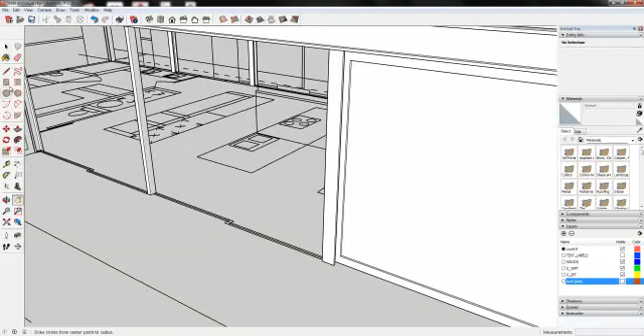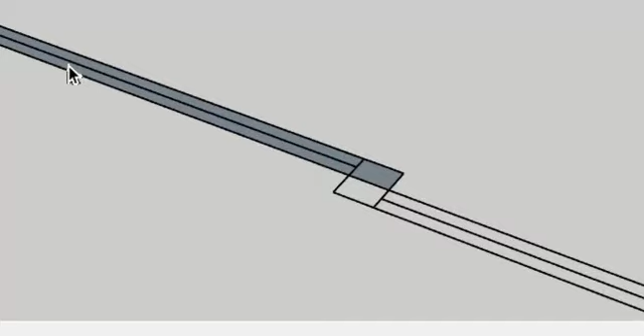I'm going to create a rectangle, zoom in a little bit, and create the bottom portion of one of my doors. From there, I will turn that into a component, and I'm going to call it glass door 1. Make sure it says replace with selection and click create.

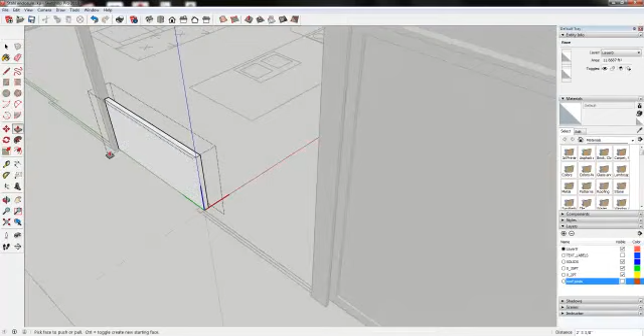Now I'm going to follow the same procedure that I did with the walls. I'm going to double click on that component, and we're going to raise that door all the way up to the underside of the beam. Now keep in mind that even though we're trying to reference construction techniques and how the building is put together, we're not necessarily modeling every single piece of the building. We're really just trying to create a reference to what we think it looks like.

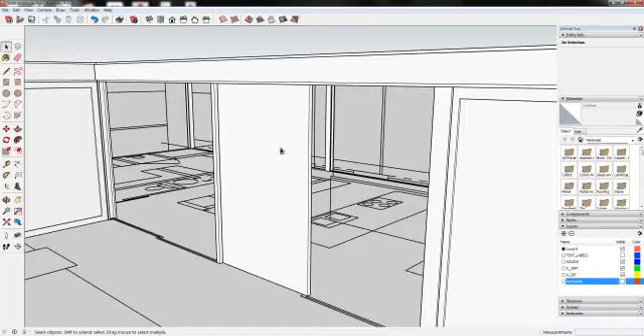So now that I've got that single door panel, let's do this just for fun. Let's make a copy of that panel, and you can see how the component feature works. I'm going to copy it into the other places where I believe those double doors exist, at least on the front side of the building. And again, that's just using the move command and holding down the control key.

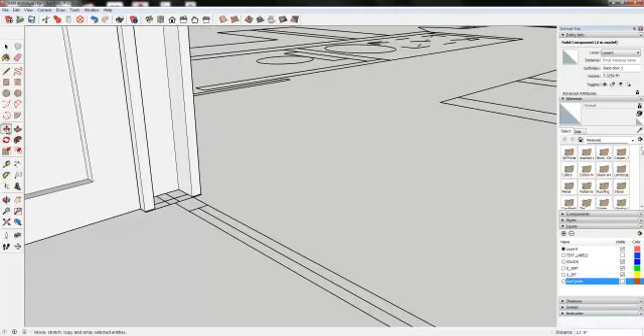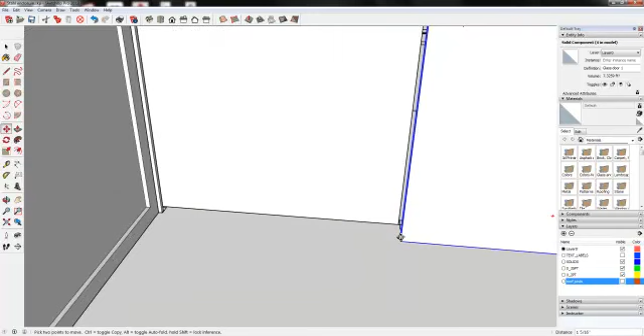Again, don't be afraid to use the endpoints as a reference. And let's copy that over to this side as well. So it's kind of an interesting intersection in that back corner. I'm going to cheat just a little bit, and we're going to move this one over to the outside frame like it would be on the other side, and hit zoom extents.

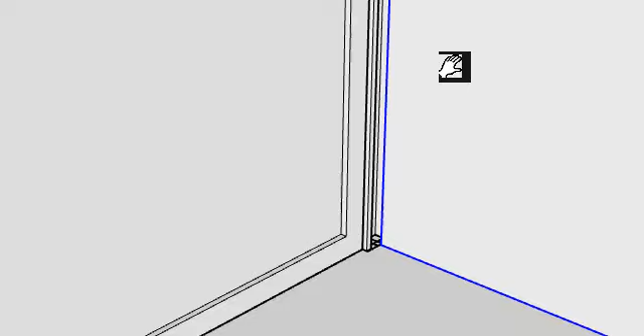Again, without construction documents, we're not exactly sure how that piece intersects at the column, but it appears like at that point it doesn't go through the flange.

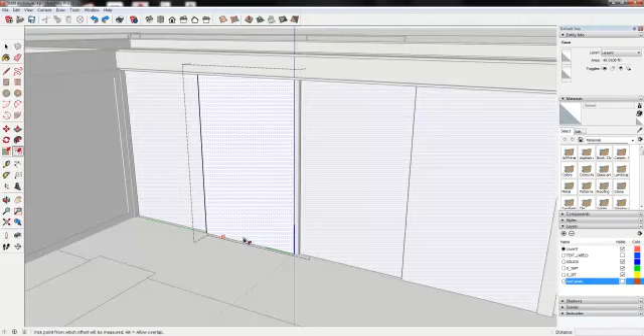So now we can select one of our doors, and we're going to add the glass panel, and we're going to make it match the existing frame system. I'm going to double click on one of those components, offset, and grab one edge of the panel and offset 4 inches. I clicked too quickly, so I'm going to grab it again and slide that in and type in 4 inches. Now you can see all 4 of the doors are showing that frame system.

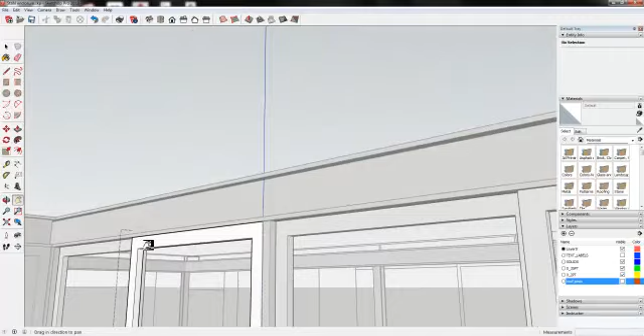And I can push that piece out till it vanishes. And then we'll go in. We're going to add materials later. I know some of you guys are anxious to get into it, but we will add the materials for the glass later. Right now, I just want to add the pane in that creates the glass.

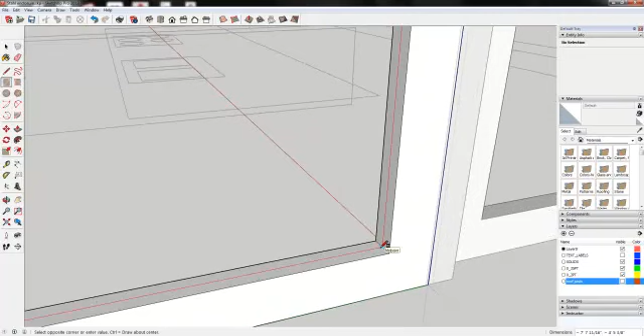So I'm going to select a rectangle, and I'm going to draw it from the center of one section of the frame and slide down and add it to the other section. Notice right now if I were to click, it would draw kind of a goofy line. We want to make sure that everything we draw is planar, so I've got to hit the center. You can see how my boundary box turned red, showing that it is definitely on an axis.

So now I've got my glass doors in where the kitchen goes, and I'm going to go ahead and then we will just copy those doors to the other side of the building.